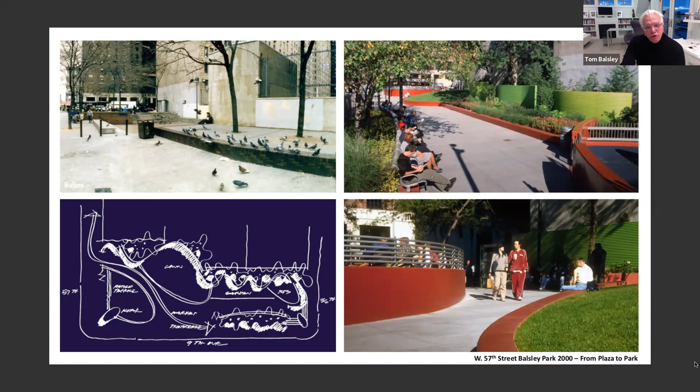And so we were able to transform this failed space into what you see on the screen - these wonderful green spaces for this neighborhood that have completely transformed its character and really touched people's lives. There are examples of those kinds of plazas all throughout the city.

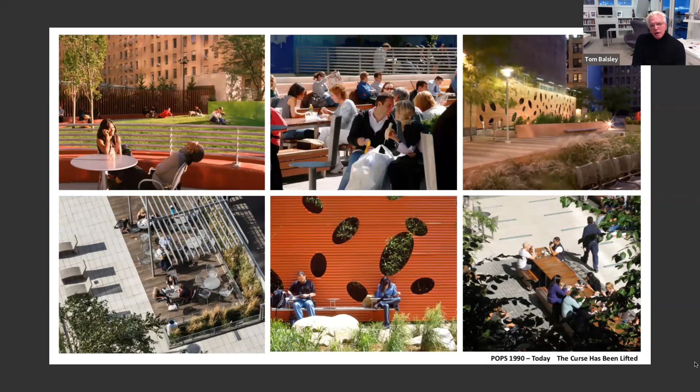These are just a little eye candy of a few examples, but they've had an enormous impact on our lives here in the city. And those that have failed have a chance to be turned around, as I demonstrated with the previous slide. So the city has the opportunity to take 95 acres and, if it's failing, actually turn it into a success like you're seeing here.

This is one little POPS I wanted to bring to your attention, only because when I first came to New York in about 1973, I sat on this corner, the corner of 3rd Avenue and 8th Street. And if you know anything about the 70s in New York, this was the cultural crossroads of the city.

It was the gateway into the East Village, which was chaos and more. And then there was the genteel village. It was a wonderful corner to study people and see the way they were acting and misbehaving - it was just extraordinary, better than a Broadway show. Now, as I sat there as a landscape architect, I said, you know, this corner really needs a plaza.

It needs a public space. And of course, then I went on with my career.

About 8 years ago, I got a phone call, and the client asked me if I wanted to design a plaza on the corner of 8th Street and 3rd Avenue. I almost fell out of my chair. I thought, I think I already have it designed in my mind. So I went on to design it, this little space that you see here that's always occupied day and night, and it really still is that cultural crossroads of the village and of this part of the city.

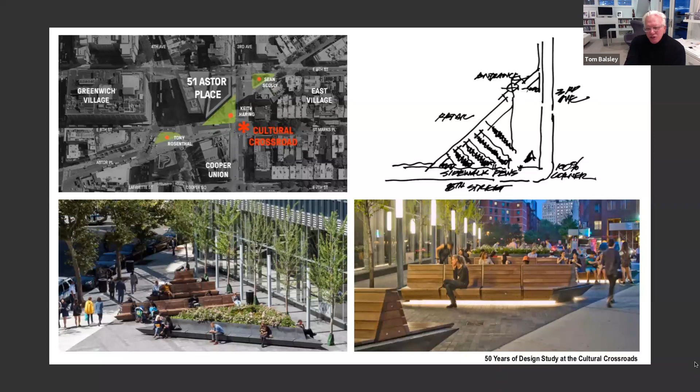About 3 years ago, I merged with SWA, who is the largest landscape architecture firm in the US. One of the first things I did was begin to sound the alarm that it was almost 40 years since the famous Holly Whyte book came out about the social life of small urban spaces. This was a very important book for all of us in this business, who were studying urban design and small urban spaces - architects, urban designers, landscape architects. Holly Whyte was legendary, and his book was almost a manual. I taught it in my first class at Harvard, and I insisted that the students see his video. It was that important to all of us at the time.

But his work was based upon his observations as a sociologist of New York City and public spaces in the 1970s. What we've witnessed is an extraordinary change in this city - we can have movable chairs, that would be unheard of in those days, or furniture that swivels and shifts around, these wonderful garden spaces with small personalized public spaces. All of that was kind of unheard of in the 70s. In fact, I had clients tell me I was free to design the plaza any way I wanted, as long as I didn't put a bench in it. It was really that kind of background in the 70s.

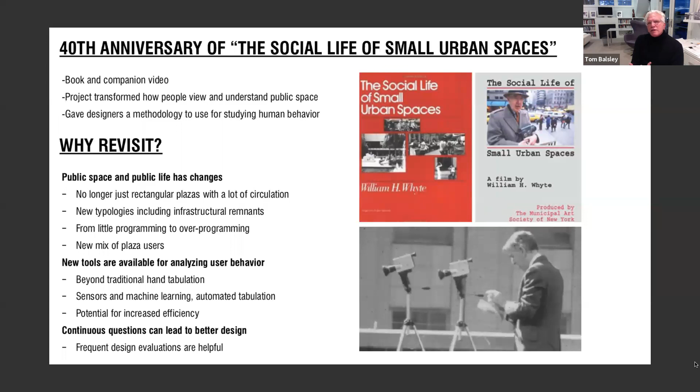So we thought all of Holly's observations, we should renew them, refresh them, take a look and see what we can do, and how technology can help as well. What we did with Emily and Anya - they got together and created this new manual, which is going to be the precursor to what we hope will be the next document similar to Holly's, that we can put out and make available to everyone.

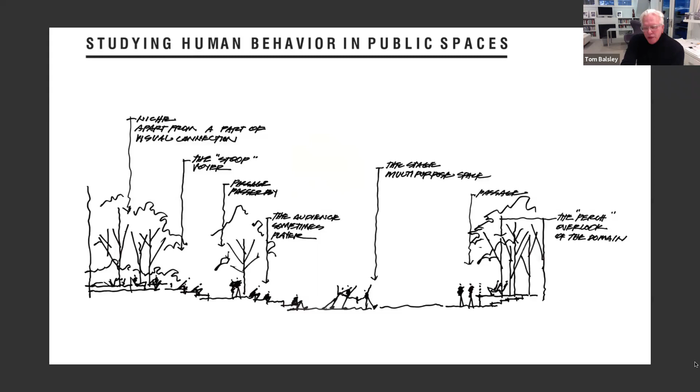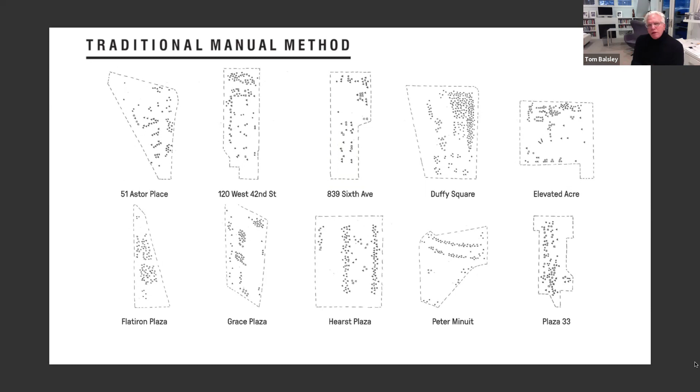It took into account about 10 spaces in the city. They went about measuring its success, occupancy, and the behavior of people within the space, doing it in a very traditional way through observation. But they also brought in a technology called automated heat mapping, which can actually map people and bring that data into programs to develop a database useful as they're designing this space or others moving forward. We hope that will be incorporated into this new book we put out, but the beginnings of it can be found in this field guide we've released.

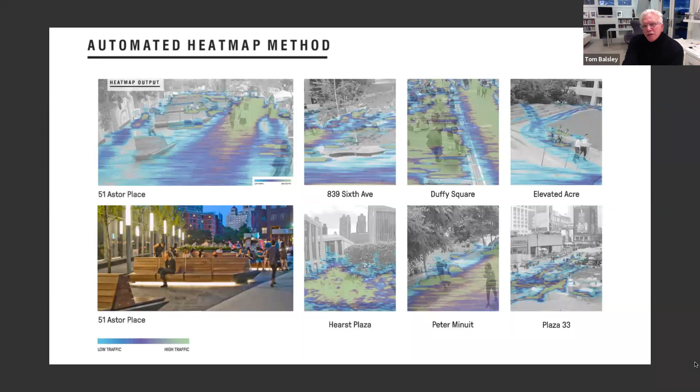One of the things that comes out of designing these small public spaces is you begin to understand, through the eyes of a sociologist, how important public seating can be. It's not just about a bench anymore. We're living in a different culture of recreation.

If you think about how the benches are arranged in Madison Square Park, they're all in a row because people used to promenade in their top hats and nod to each other. That was what going to the park was about, being seen and saying hello. Well, we're not quite that way anymore. We're much more informal in how we interact, and what we call 21st century recreation is a much more relaxed kind of lifestyle.

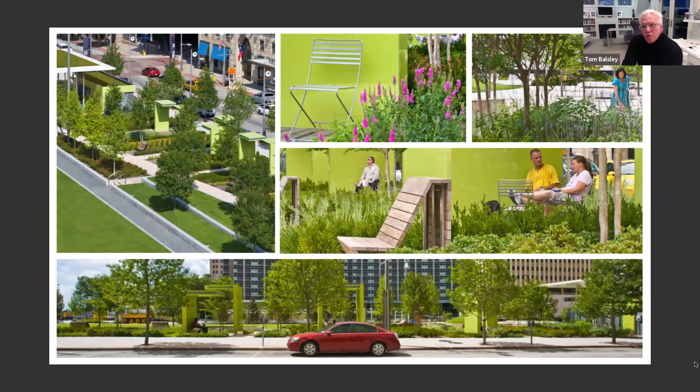You'll see these little green shelters we call study shelters, because the University of North Texas moved their law school across from the park when they found out there was going to be a park downtown. So the park has not only generated social activity, but has actually generated commercial, retail, and development activity around it, as we know most open spaces do.

Here you'll see a little cafe and a lot of shelter, because Dallas is pretty hot. We've got misters that come out of the upper columns of the shelter that cool the air in this cafe. Then we have a river bottom kind of water feature with white marble slabs in the middle of the river, so you can sit in the river, take your shoes off, and cool off on hot summer days in Dallas, and have lunch on one of those tables. So there are all those other opportunities for public life to just explode.

And of course, the nighttime is the part that we've focused very highly on in terms of extending the hours of enjoyment and usefulness of these spaces. They shouldn't just go dark. The lighting should be an attraction for activity to continue through and into the night.

That work has attracted clients in other places around the world, in China, Japan and Korea. I'll show you this project very quickly, now actually under construction in Moscow, in downtown Moscow in front of its major rail station called the Paveletskaya station. You can see that on the upper left-hand slide. Here's their major train station, and this is a large front area that was just a parking lot before, and the city committed to turning it into a large public park and creating entrances to retail spaces below.

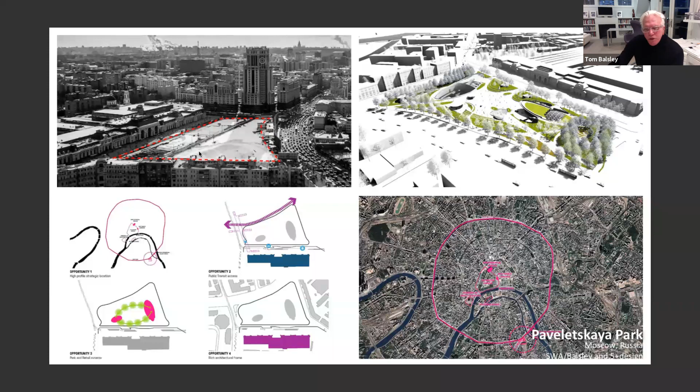So these are all of the studies that we conducted prior to creating this new image for this park. This was an international design competition that we won together with a firm called 5+design out of Los Angeles. You'll see that it's going to transform not only the foreground of the train station and all the activity we get with the train station, but also the neighborhood around it.

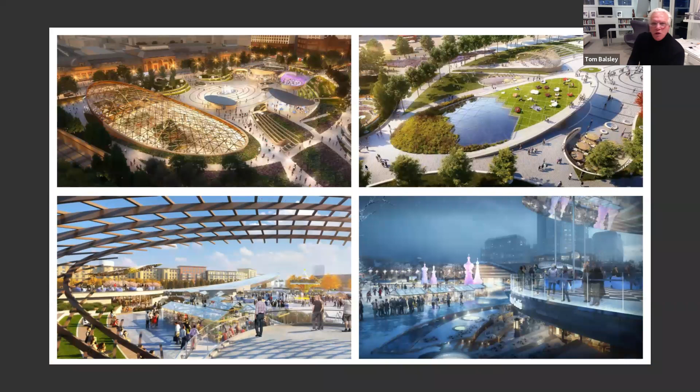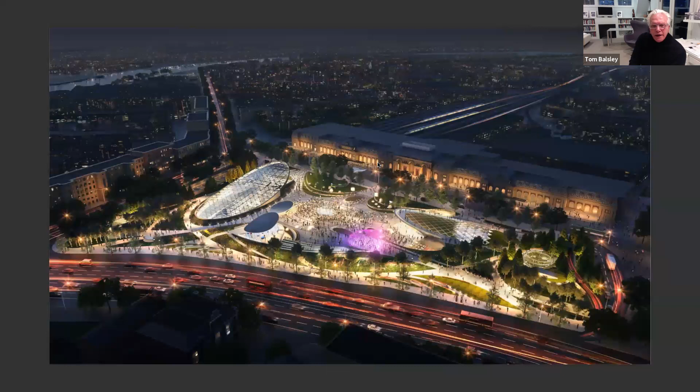We honestly looked to Bryant Park and its programming as a model for what we could program into this space as well. So of course it will have the retail entrances, pavilions, but it'll also have markets and ice skating or ice rinks throughout the winter. Again, the lighting is a very important component to keeping this space active and vibrant throughout the evening.

Now, the work we've been doing with waterfronts attracted attention from the officials and government agencies in Rotterdam. So we were called into Rotterdam to see if we would conduct a design competition, or participate in a design competition, for this neighborhood in Rotterdam that has been surrounded pretty much by the underprivileged, the immigrants who've come to Rotterdam - there's a very strong immigrant population.

But you can see just from the area around this park site, this new park site, there are very few open spaces compared to the amount of green space in other neighborhoods. So there was a real challenge for the city to create new viable park space for this neighborhood, and there was a shortage of land.

But what they didn't have was a shortage of these great harbors that they carved, that the city was built on for shipping, but that shipping has long gone or partially gone. So the city made a very dramatic decision to actually fill in the inner part of the harbor and create new park space for the neighborhood. We were fascinated by that and participated in the design competition. I'm happy to say that not only did we win the competition, but the city has raised money to build this park, and it has been renamed the Nelson Mandela Park.

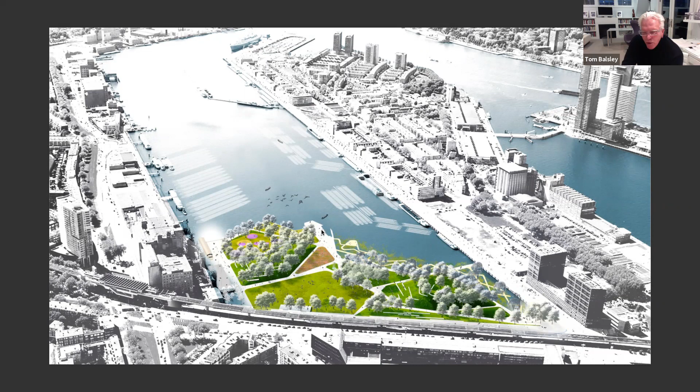So we're very excited to be participating in this park, along the water's edge of the harbor. We're going to develop a whole series of tidal marshes and get-downs. There'll be a water taxi that will be part of the whole water taxi system of the city. And then there'll be large open spaces for events and more forested areas for people who want to get away a little bit deeper into nature.

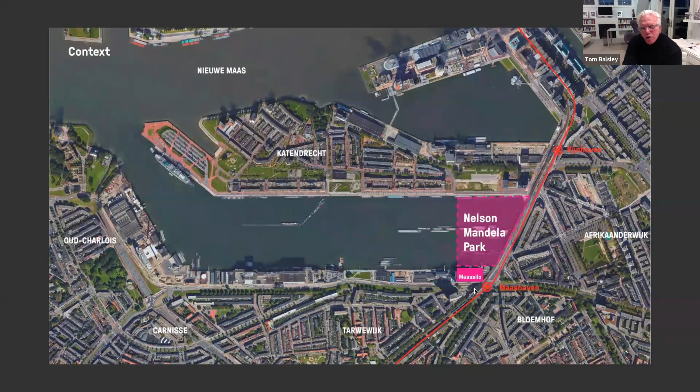This is the site, filled into the inner portion of that large harbor, and you can just get a sense of the scale of the space. It's pretty extraordinary, and this is not some remote park - this is right on their main metro, the Maashaven stop. So this park is right here in the city and will be right there at the fingertips of the neighborhood you see just to the south.

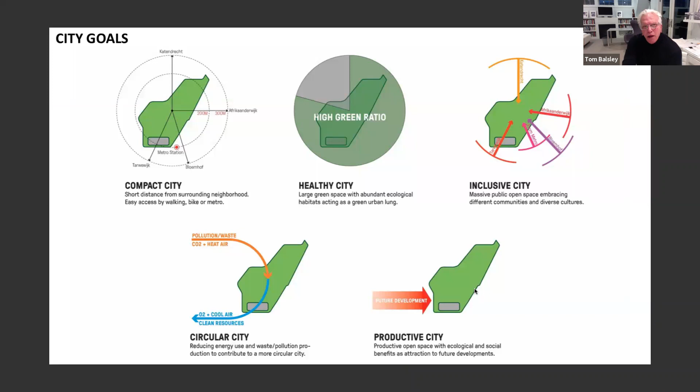Of course, we went through a whole series of dialogue with the neighborhood, the city, the stakeholders, all leading to what would be a program for the park in a general direction to refine those design ideas. And of course, a very careful site analysis of all these conditions of the edge and transit, et cetera.

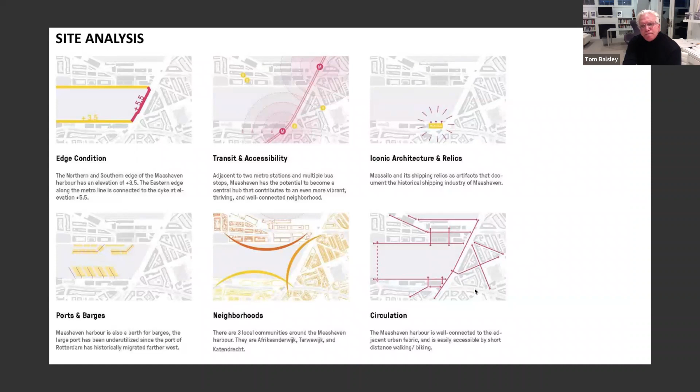And that all led to this master plan for the park. You wonder what is in this water in the basin itself - these are barges that are parked here. This is basically a parking lot for barges. It's no longer taking in ships for loading and unloading, it's just simply barges being parked. So there's actually a possibility as they find more parking spaces for barges, they can enlarge this park and get more land for even more program.

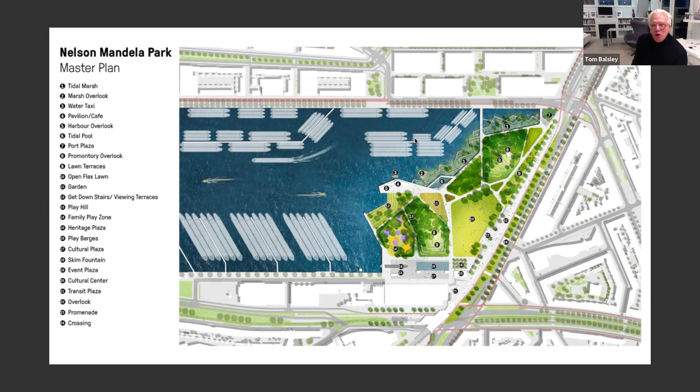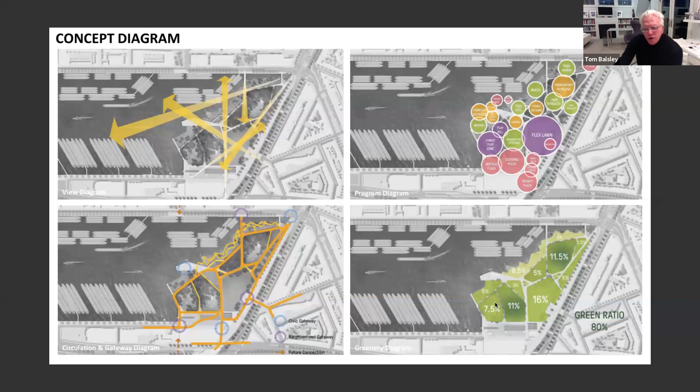These are just some of the breakdown of the program for the inner park spaces, the circulation, the sight lines, the amount of green space that we're converting and adding to the neighborhood. All of this is part of the development of this park to make sure that it's really going to resonate with the community. And just an image of if you wanted to climb some of the topography, get a larger view of the park and out the harbor.

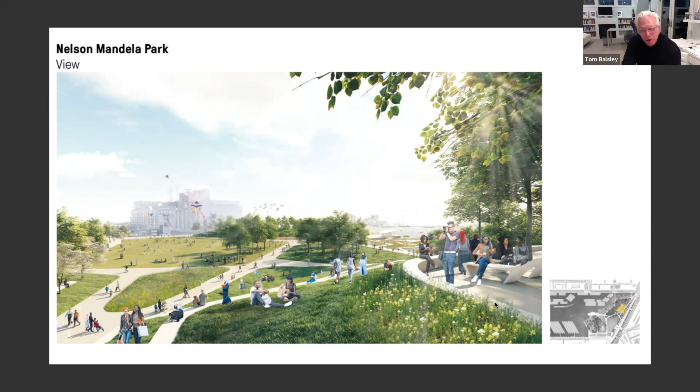These opportunities have been brought to the design by bringing additional dredging and fill, and creating topography with that dredging. Just a few other images down at the lower levels, the tidal basin of the park, and then from the basin looking back with the neighborhoods beyond.

Now, jumping back to the US, this is an important project for Portland, Oregon. This is called South Waterfront Greenway. And this was a completely contaminated shipping lumber site, part of what built Portland into what it was, but it had been long left to degrade and eventually slowly erode into the Willamette River.

The Willamette River actually rises up almost 30 feet, so the elevation you see of the park versus the river is explained by that extraordinary change in water levels between spring and summer. This is the site, and you can see it was just an industrial site. They made barges and ships, and they used to take the Liberty ships and break them down, bring them up into these boat ramps, work on the ships, and then relaunch new ones here.

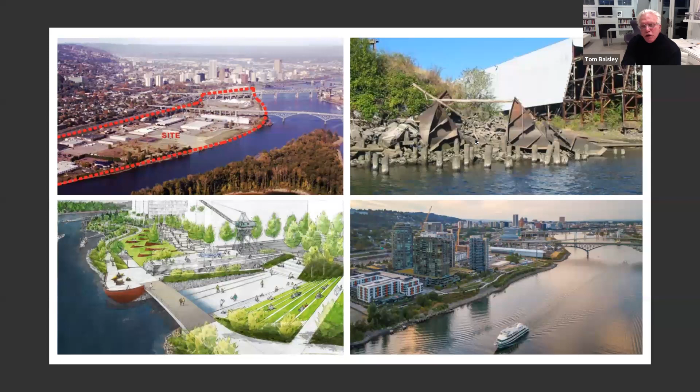There's a lot of maritime history here that we felt should be uncovered. Of course, it was covered through contamination, but we felt it should be uncovered, revealed and celebrated as part of the new design for the Greenway and the park. So you can see the extent of the Greenway, and of course with it comes all the new development that is paying for it and watching over it and maintaining it.

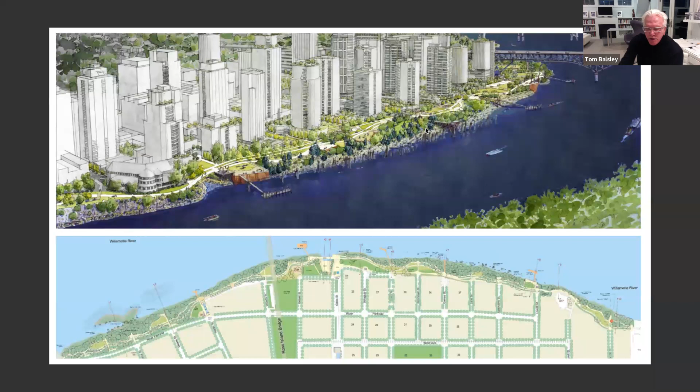And it's a continuous walkway and bikeway, but then there's a whole series of community spaces and overlooks that interrupt that experience - just one peek of a piece of the Greenway, as you might expect. It's so large that it is happening in phases, and I'm showing you the first phase, but this really does give you a sense of how impactful it is for the existing residents, the upland residents, as well as the new residents.

And introducing public art into this experience as well, some of it making reference to the industrial heritage, and some of the forms of the overlooks also taking their cues from ship hulls and Corten steel and heavy industrial materials.

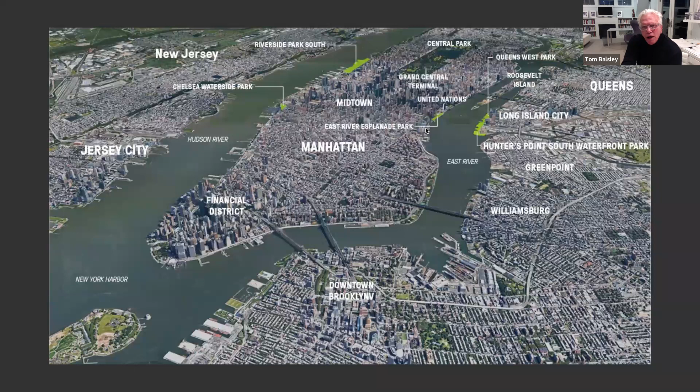So we jump back home, and this is what we promised you - we're going to show you two waterfront parks. First, Riverside Park South, and then we'll go over to Long Island City and we'll show you the Gantry Plaza State Park as well as Hunters Point South.

Riverside Park South is a very complex undertaking. We actually did the master plan in 1991, and the master plan called for this highway to be lowered to the ground and threaded through what would be new tunnels back here. You see the mouth of the tunnel back in here.

And as that money was being raised, which would require federal and state money, we moved forward with the waterfront portion of the park, and we're still stalled on the financing for that. So we're moving forward for the upland portion of the park as well. But what it's done for the west side is extraordinary. It will be even better when the park is threaded through that tunnel.

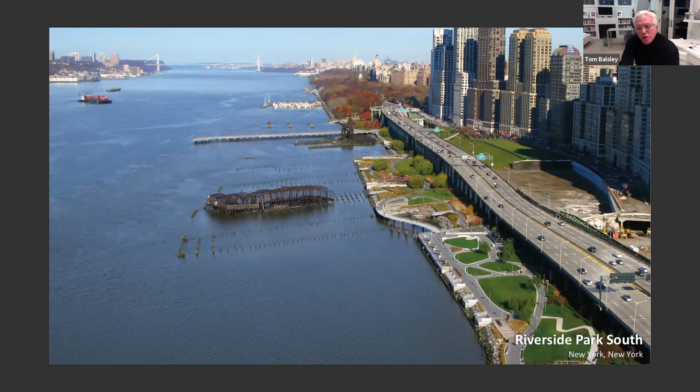But west siders at this point have almost begun to accept the highway as it is, because they now have access to a river they never really had access to. So they're just threading their way down to this park, and it's theirs now, in a very different kind of way than maybe a Battery Park City with a bulkheaded shoreline.

It has a rich narrative of the railroad activity that took place here, and was a place for many on the west side to work. So we've made sure that the railroad history is being told in all the landscape narratives.

This is just to give you an idea of the planning. Here's the park with a highway in place, and here is the park with the highway threaded through that tunnel. Now the whole west side, under this condition, will be able to just move down the streets, down through the park and to their river. This gives you the cross sections that show you how that's working.

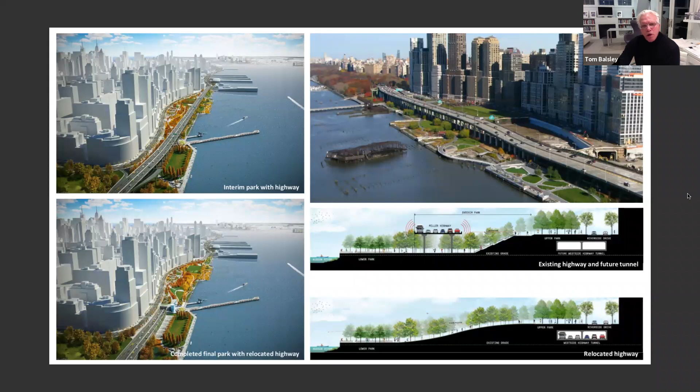The first phase that you see now, the tunnels are installed. There's a little bit of an upper park here, and then all of this is built. More of this is being built as well. But in the future, as that highway is brought through here, more fill will be brought in, and it'll be one large park just cascading down to the Hudson.

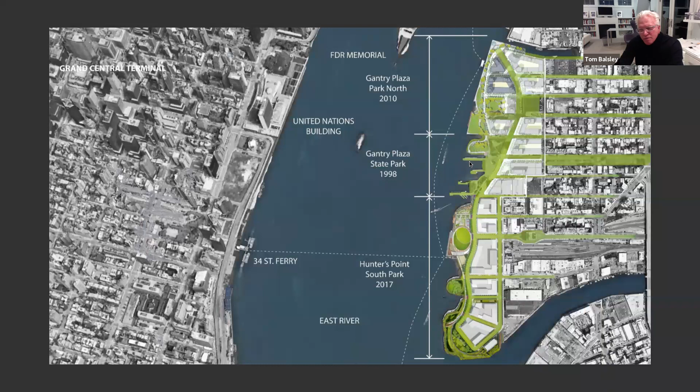So we're going to take a trip now to the East River, to a vision that started in 1993. It was called Queens West. It started up here at the Anable Basin, and it included this entire piece of property all the way down to Newtown Creek. It started with a master plan called Queens West, and then the first phase of it was Gantry Plaza State Park, which is this park here.

And this park won every national and international award. It really established a new paradigm of waterfront parks by celebrating the history and the culture of the place, and also environmentally repairing the edges of the river, doing it all in a very contemporary, progressive way with very contemporary design gestures.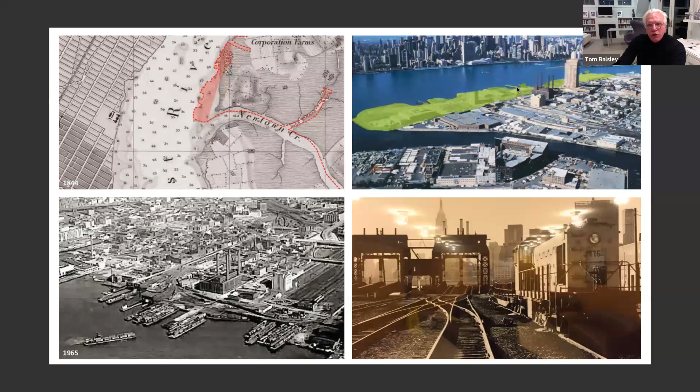This is the site in its early beginnings. It was actually a marsh as part of the river when the river was much wider and not as fast. Then, of course, it got filled in, and it turned into industrial warehouses and barges, and the railroad came down to the site. It just lay fallow like this for years and years and years, until we discovered it and transformed it into Gantry Plaza State Park.

It was even featured in the BBC's Around the World in 80 Gardens, a wonderful documentary shown many times. Airline passengers would take a flight and say, I saw Gantry Plaza State Park in that movie on the airlines. I thought that was an interesting idea of what a garden was, but Monty Don seemed to think that Gantry Plaza is a garden the same as any other garden around the world. It's its own post-industrial garden.

This is just a view from the park looking up towards Hunters Point South, which is our last featured park in the talk. And just a peek of some of the wonderful gestures within Gantry Plaza State Park, how we've transformed what was this gantry into this wonderful tower and a bridge and a wonderful plaza, a setting for people to gather in very close proximity, or in large crowds - this might be the longest yoga room in the world, I'm not sure, but this is the huge crowd gathering before the fireworks that you see here.

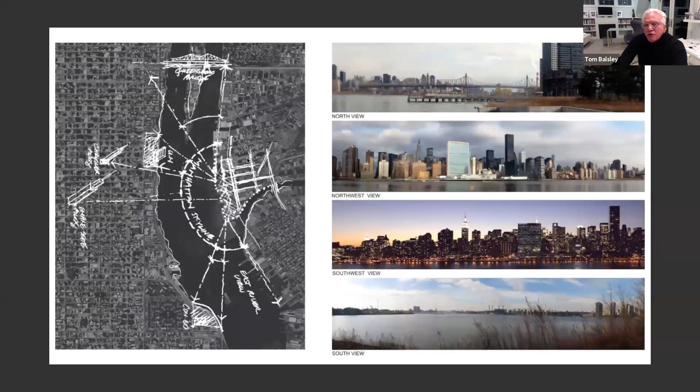So we looked at it and thought, you know, Queens is pretty flat - this is an extraordinary opportunity for us to really take advantage of views from a different perspective. So we really focused a lot on the views and the views of the city. You can't get away from them when you're over here on this shoreline, but when you get up in elevation, it's an even stronger, compelling design idea.

And this is just an image of us walking up on top of the hill, but also being very aware of the kind of resiliency that had to be taken into account with the design, as well as the heritage of the railroad and the transfer of boxcars out to rail barges. All of that heritage was a very big part of the approach to the design in telling that story.

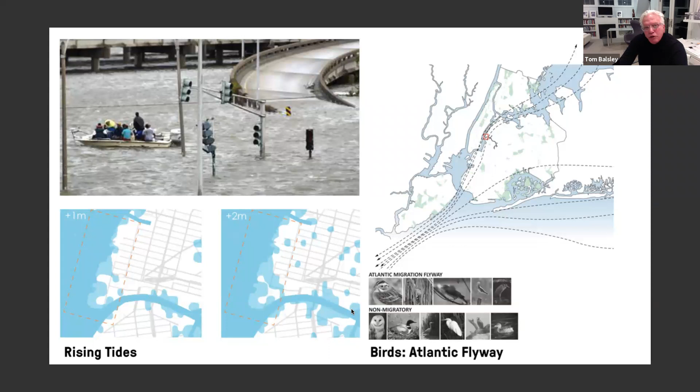This is just some of the studies we were doing about the rising tides - the 2 meter, 1 meter, 3 meters - as well as the birds, the flyway that moves right up the East River and right over this site. All of this led us to the conclusion that we really felt we needed to create a new tidal marsh along the edge of this park to protect this community, but also to create a new habitat that had long been lost.

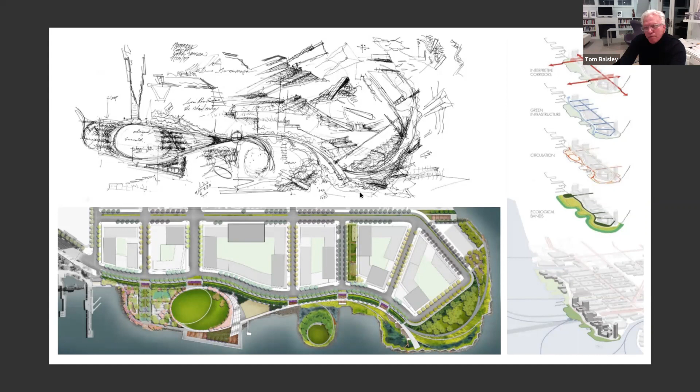And it wasn't an easy endeavor. It was built over the Queens Midtown Tunnel, over electric transmission lines and utility lines - a very, very complex site, which is why we worked with Arup. This is a collaborative design effort between SWA Balsley and Weiss/Manfredi, but with very strong leadership, engineering leadership and infrastructure leadership from Arup.

And they were needed, as you can see, to help us with the infrastructure that's just below the surface of these wonderful landscape experiences.

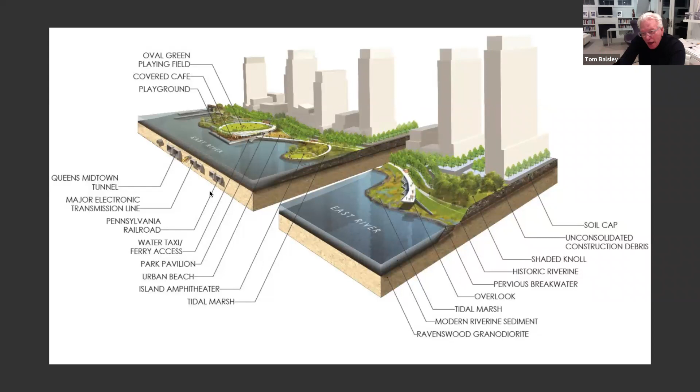So here we go, we have a peek of the overall park. This was the first phase. It was completed, and we were fortunate to win an ASLA design medal honor award for the first phase.

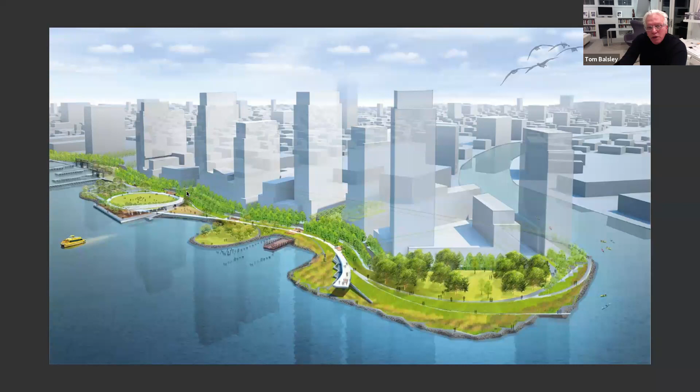And then we won the same honor award for the second phase a couple of years ago. The second phase is more dedicated to resiliency, to marshland, to promontories and forests, while the first phase is more given to service to the community with very active green play areas, a much more social kind of space that can really serve the community in ways it said it needed.

Not only did we get voices asking for a play area or a dog run—you can see how popular this space is with the community on any given night—but the community was also very vocal about wanting a very quiet, passive space, a resilient kind of space that was sustainable, that they could point to with pride and participate in.

So it was a wonderful combination of the very active node that you see here, and the more passive area of the second phase.

This gives you a little peek of the dog run, and we have a rail garden here, paying homage to the rail lines that used to come right down to this site, and the play area, a little urban beach for the neighborhood children.

Here's the dog run, and just little overlooks that give you an opportunity—a small group of 1 or 2 people can find their own space anywhere within this park, or they can go to the center and participate. We've got a high school across the street, so they're very active out in the park. But if you come out on the weekend, you'll see people just lounging around, or next thing you know there might be a Bernie Sanders rally out here. It's been designed to accommodate all of that.

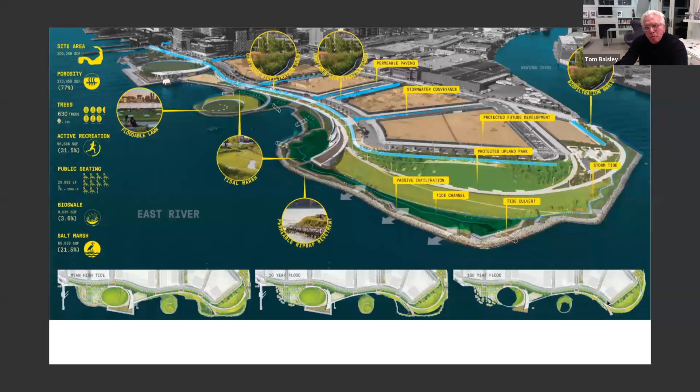This is the creation of what we call New York's newest island, where we actually carved water behind that landfill and let loose this piece of land into New York's newest island. It was once a tilt barge, or a tilt bridge for barges, and now it's this wonderful new urban island.

And of course, we have this wonderful public art piece by Nobuho, who captured the whole idea of the tides and the impact they have on the site. She captured the 7 stages of the moon in various stages with a luminescent paint. As it goes dark, it glows in those 7 stages. It's a wonderful piece of art that attracts people to it. The island is a special place.

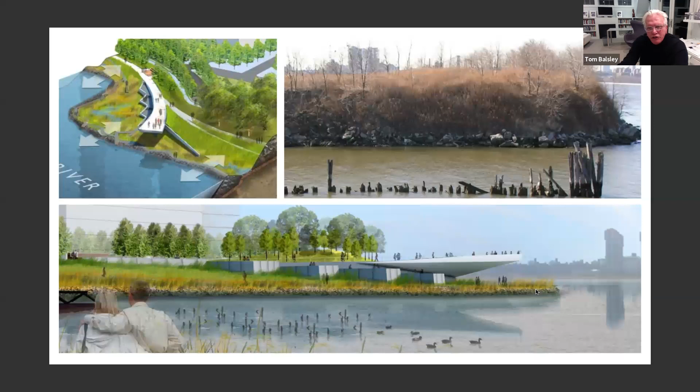This is the transformation of the larger landfill into this huge civic overlook that cantilevers over the marsh below. You can see just in this section, that's the overlook, and this is the marsh, and then this is the remnants of that large landfill that was created from the excavation for the tunnel.

We thought in order to create a marsh, it needs protection. So the engineers told us what the bare minimum protection was, which was kind of a very engineered abutment or revetment along the edge of the river for waves and storms, etc. Otherwise, the marsh really wouldn't be able to survive or thrive.

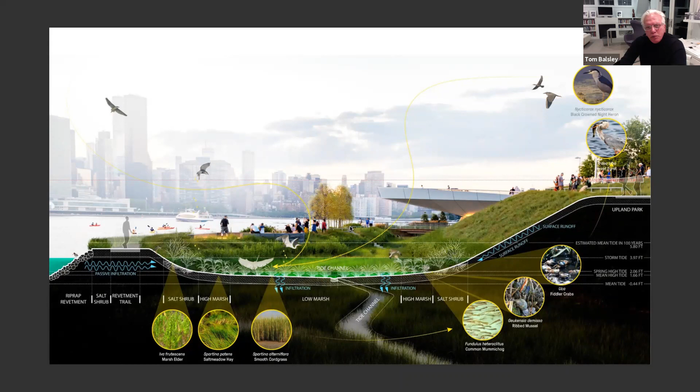So we decided, why don't we just make that revetment a little wider and turn it into this wonderful trail along the edge so that you can get closer to the river and sort of be trapped between the marsh and the river and the city. It's a wonderful experience walking along that trail. It really takes you to, as you can see, it's otherworldly. You can't even imagine that you're that close to the city.

And as the tides come in, that marsh begins to fill with water and it takes on a whole new character.

And then finally, as we go up to the highest point, we have this wonderful cantilevered overlook. We think it's the best place in New York City to have your wedding photos, but it has attracted every kind of activity you can imagine. People are just drawn to the edge, as you would expect, to take in the city.

So people in Long Island City, the community, will come down here after dinner and occupy the park all the way into the wee hours of the evening.